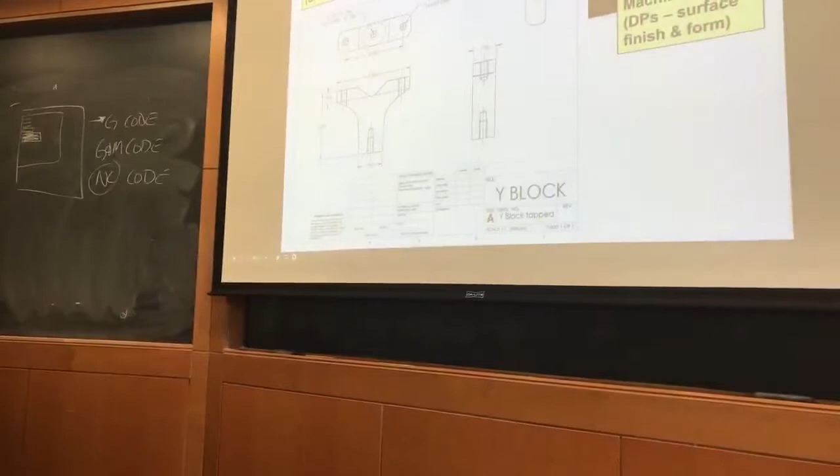Who said yes? So your two setups—I believe you put it in where, if we're looking down here... let me adjust this slightly, for all of you watching on YouTube at home.

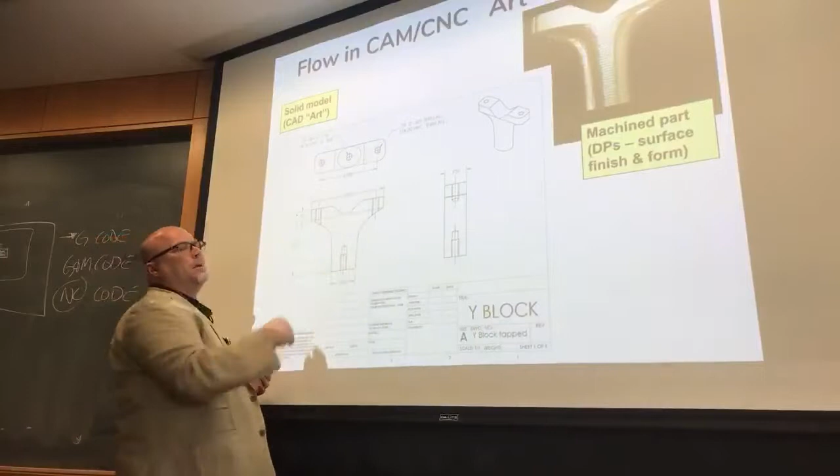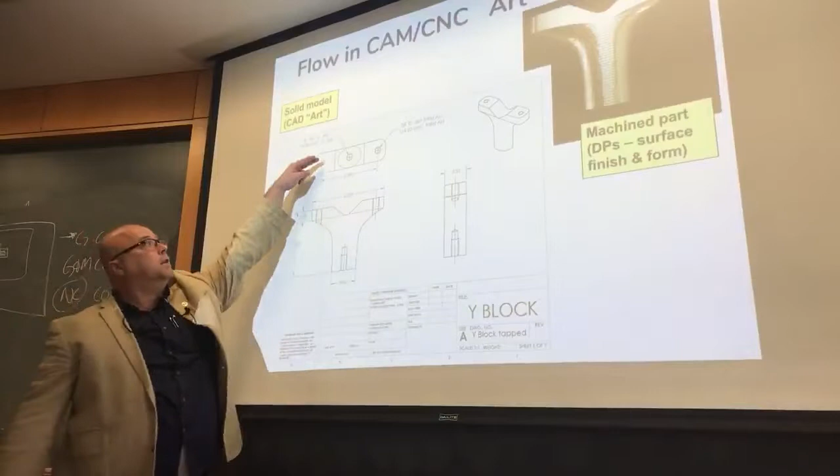All right, so our first operation, the spindle was above this orientation of the part, right? And so we cut—I don't remember the exact order—but I'm guessing we cut a contour around it like this, drilled and tapped the holes, and did a surfacing operation to remove the material in the V. Is that what happened? Maybe not that same order, but that's what happened, right?

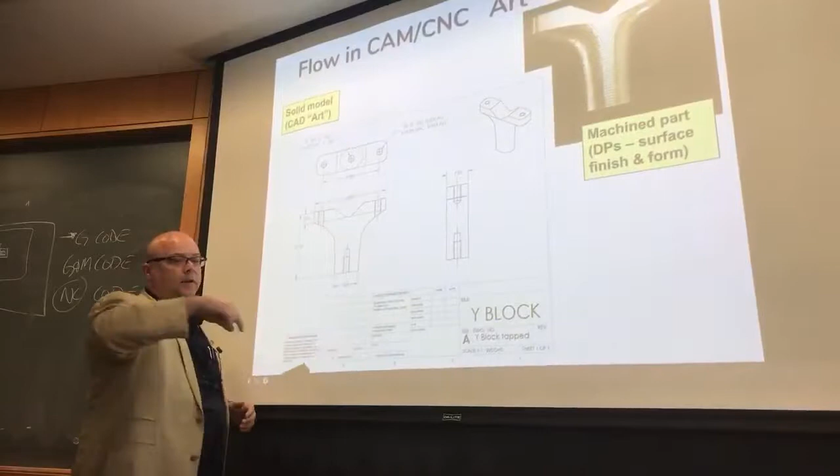So we did that, then flipped it over, clamped it on this part, and did a thing where that big face mill spiraled around the part. Was that cool when it threw the chips at the window? Yeah, that's why we do that the first day—because we totally want you guys to see cool stuff on the first day.

So, I mean, when you're at the machine, what do you have to do first? You have to put the workpiece in the machine, fixture it, right? Then you have to tell the machine where the workpiece is. Maybe you load the code before you do that step, but that's pretty much at the beginning.

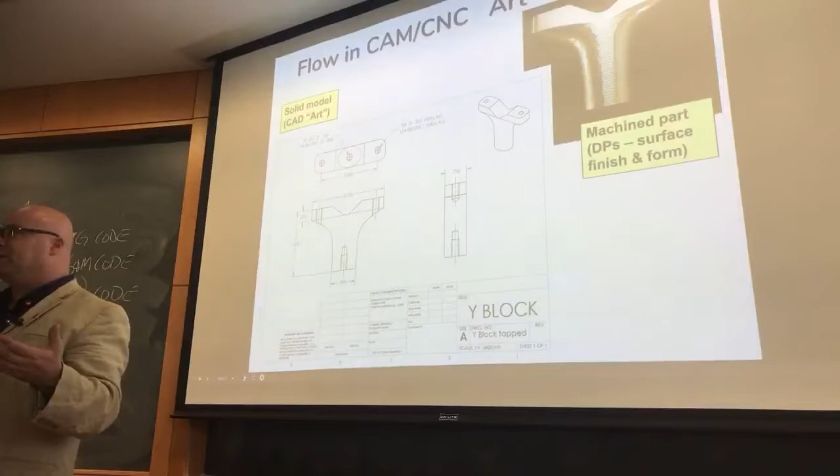There was a term where we taught the class in the order in which you do the operations at the machine. So we spent the first two weeks teaching people how to set up the machine, but never turned on the spindle. Two weeks into the class, somebody says, 'Hey professor, when do we use the machines that cut metal?' And I realized my mistake—we need to cut metal on the first day.

So you understand we're using the machine that cuts metal to do the setup operations. They thought we were just learning how to measure stuff—first two weeks.

Okay, so what if I was going to cut it in three operations, what would I do instead? We could cut it in 57 operations, but three is the next obvious choice from two. How would I do it? Somebody?

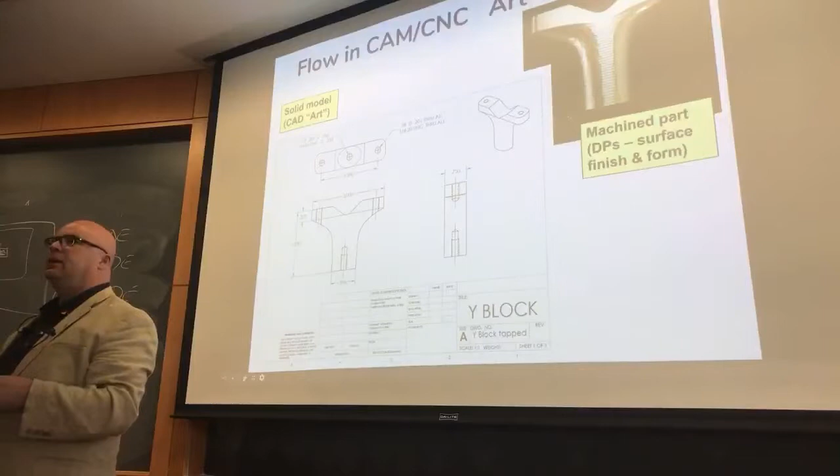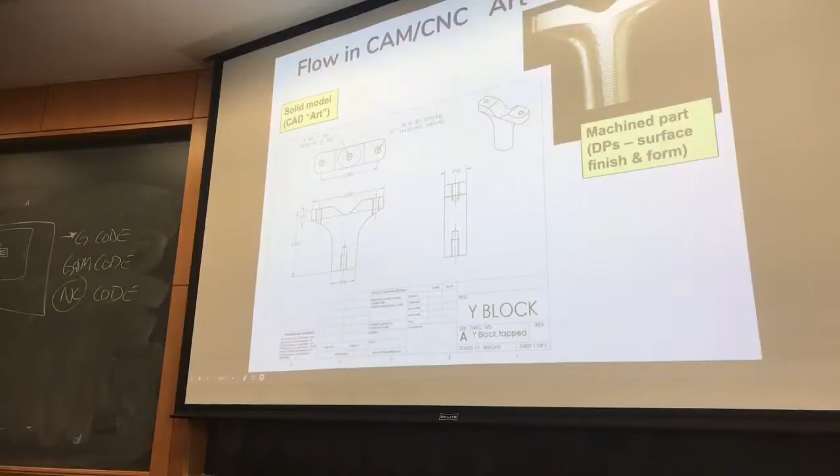Yeah, Andy. So you take it—you've got that tapered cylinder kind of thing. So you could do one side of that, coming down from one side, then do the other side, and then do the face with the Y on it. Uh-huh, I never thought of doing it that way, but yes, you could. That's not what I would do. Anybody else?

Anybody? Yeah. Oh, you could do that too. The really most obvious thing to do, I think, if you've cut a few parts...

So if we're looking down at the machine here, and that's the top of the vice jaws—does that make sense? If I'm looking down at the, so I am the spindle, I'm looking at the top of the vice jaws, and we've got our little parallels here that we put our workpiece on, and then we put our workpiece here. So we put our workpiece there, we could do a contouring operation.

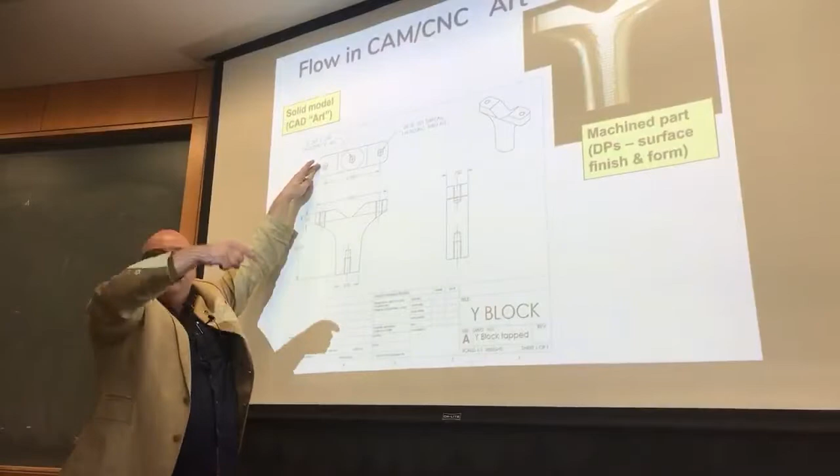That makes a V in the end of it, right? Then we could stand it up so that it's got this side pointed up, make the contour around it and drill and tap the holes, but then we don't have to do that surfacing operation to go down inside the V. Does that make sense?

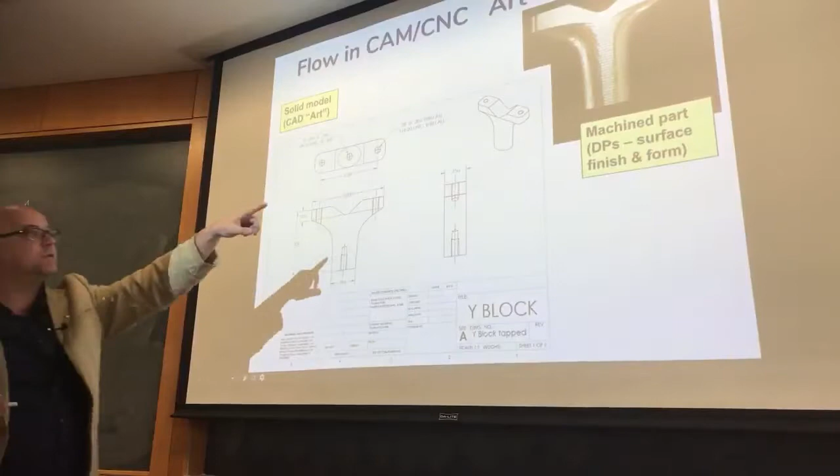So what do we notice about—well, I mean, you can see it here in the picture—tell me about that surface roughness. What do you notice about the surface there immediately? It's not, right? The drawing shows a smooth surface. This is clearly not a smooth surface, right?

What causes the scallops that we see on that surface? Let's just look at the profile. So if we're looking at the side of that part—right, if that's one side of the Y, and now you know why I'm an engineer and not an artist—but if we're looking at the front view of the part, what causes this roughness here?

Because you can see we've got roughness in that direction along the part, right? I mean, that's maybe not even roughness, maybe that's waviness. What causes that feature? Physics. I was going to say, wouldn't that be because of the, like, that side, like as you... Yep, you've got it.

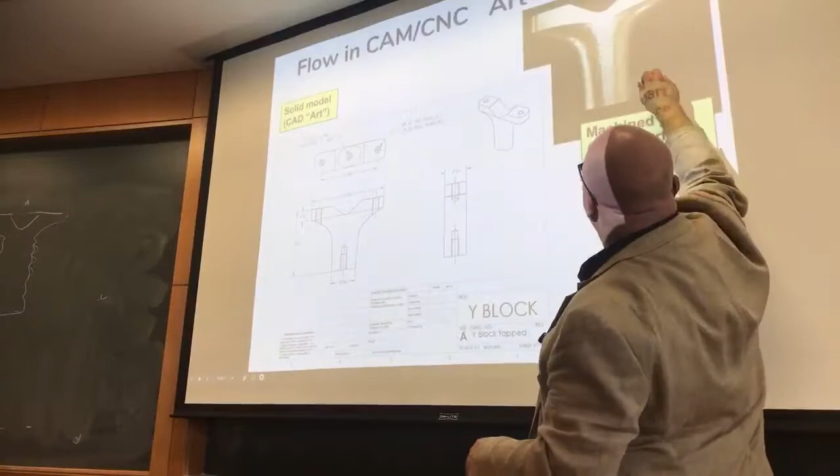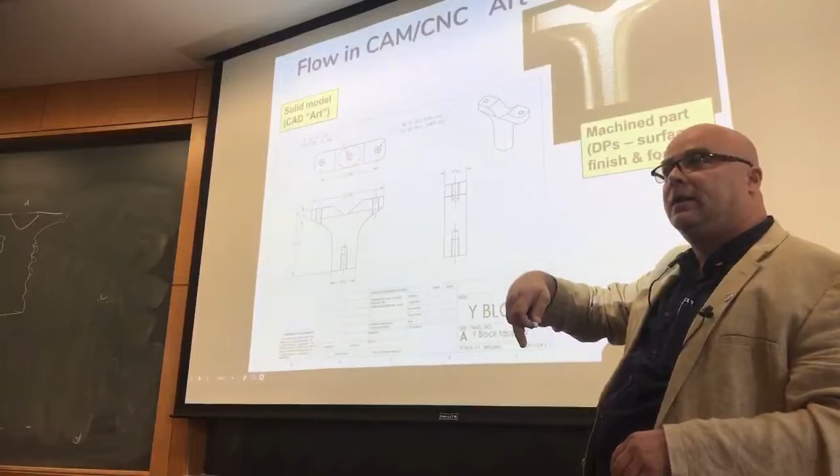So if this would be the top, now we're feeding in that direction. As the tool goes around the part, it also feeds down. It goes around the part and feeds down, it goes around the part and feeds down, right? So the radius at the bottom of that scallop is equal to the radius of the cutting insert that was on that tool.

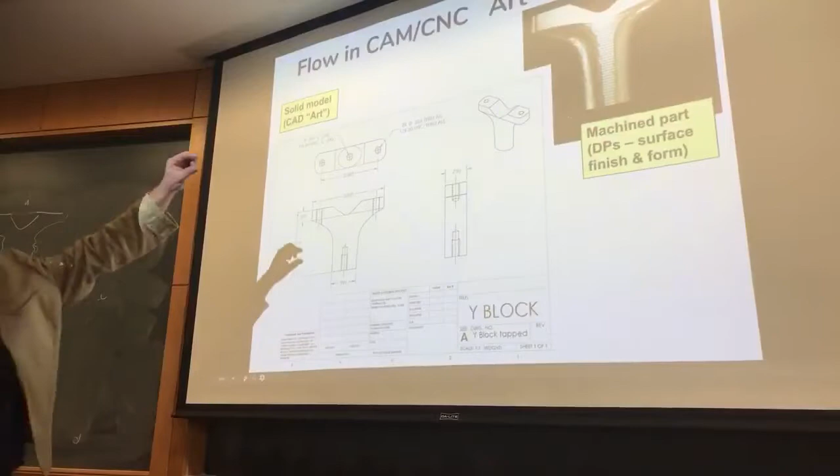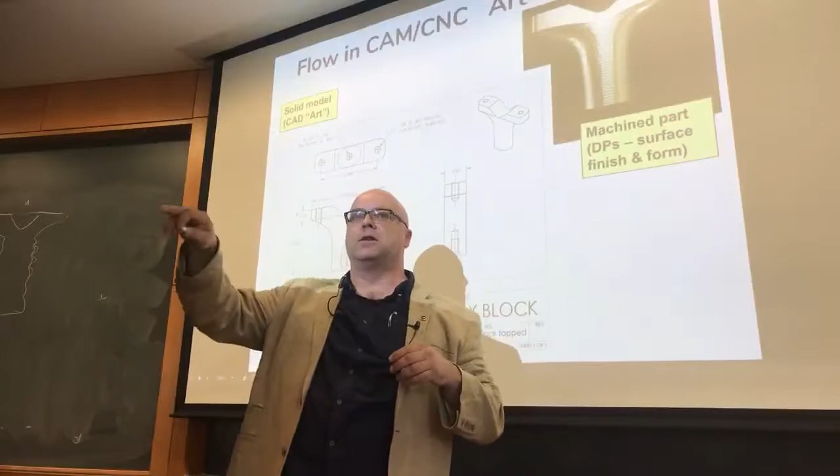The spacing between the two scallops is equal to the feed, in whatever units, inches per revolution, where the revolution is the tool going around the part, not the spindle spinning a revolution. And it's the same on a turned part. So let's do a turned part.

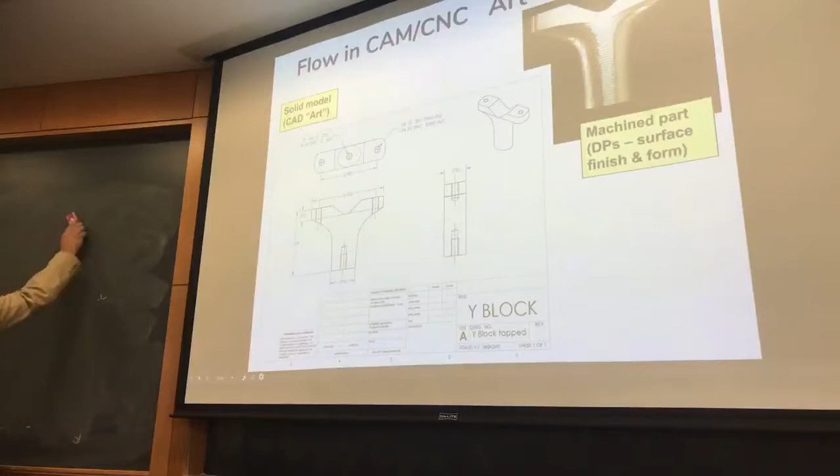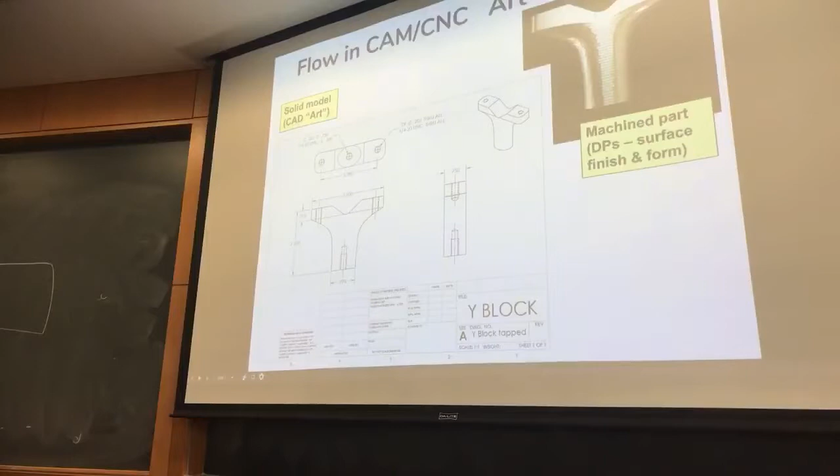So our turned part is spinning this way, our tool is here, and the feed is in that direction. As the tool feeds over, it doesn't make a smooth surface there. It actually makes little scallops across there. And so the distance here is the feed, in inches per revolution, in length per revolution.

It doesn't matter if it's inches, millimeters, kilometers, although it'd be a really small number if it was kilometers probably. You get that. You actually, with a little bit of math, you can calculate this distance too, because that's just the depth.

So you get the chord length across the chord there from your circle, because you can imagine that it's a circle. You get a chord that goes across there. It's the depth from the chord to the edge of the circle. And so mathematically, you can calculate that distance too. We do that sometimes to choose what feed rate we want to use based on how smooth we want that surface to be.

So if I want this to be smoother, how do I adjust my parameters? If I want the side of that Y block to be smoother, how do I adjust my parameter? Slow the feed down would do it. What else could I do?

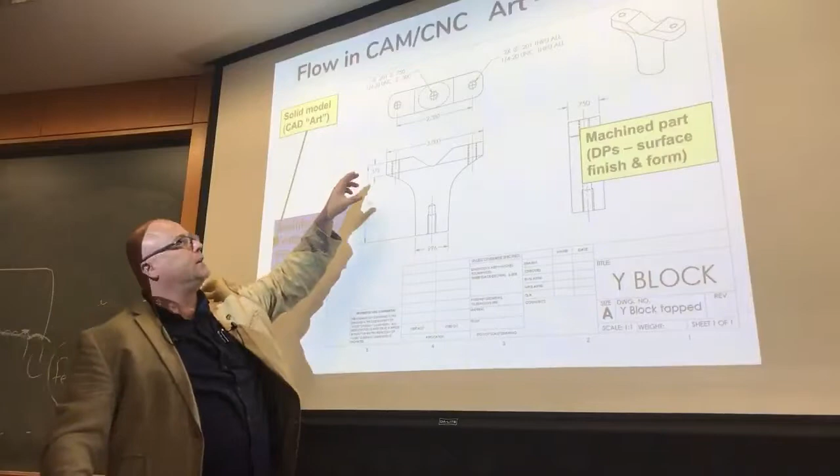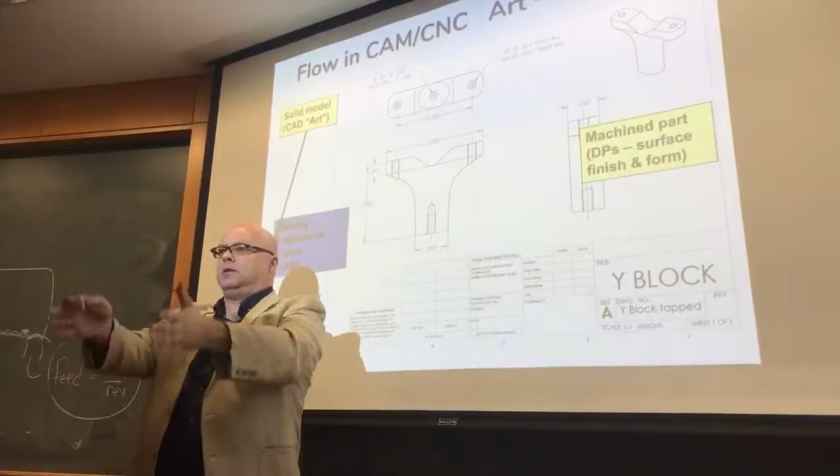It's got these tapped holes, three tapped holes on it. It's got this V feature. It's got the, I don't know what do we call this shape, the parabolic. This was originally, when it was designed, actually tapered in two directions, just to make it harder. But it's got the tapped holes, it's got that Y shape. Those are the features on the part.

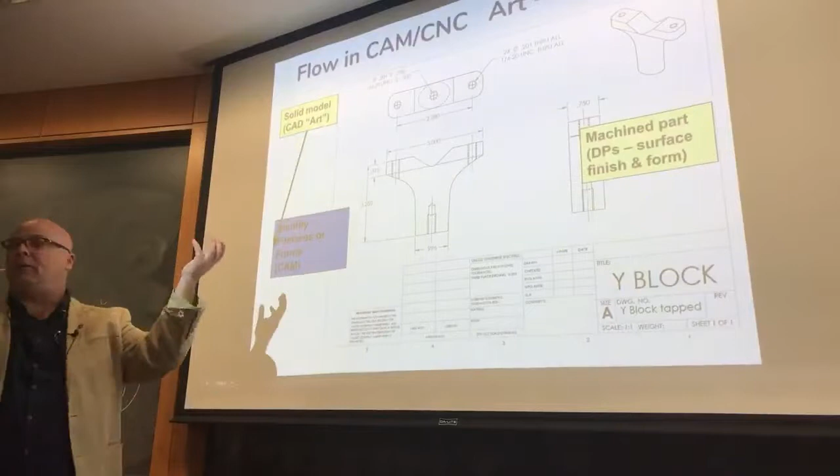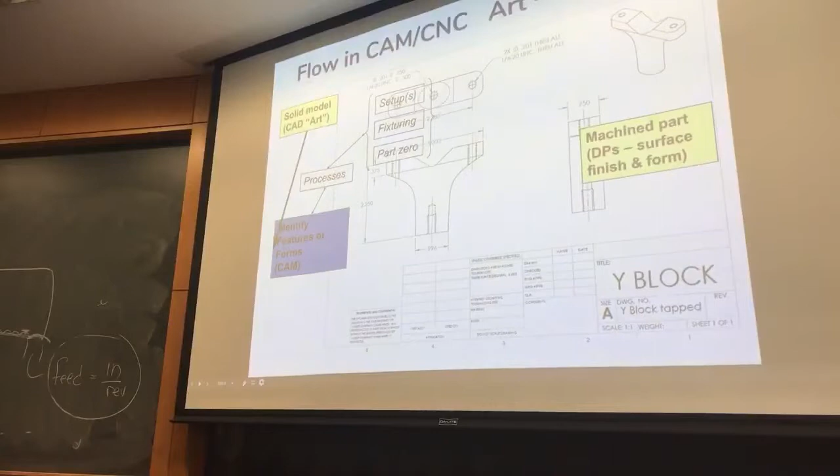So we identify the features, we decide how we're going to cut it, and how we're going to fixture it - how we're going to hold onto it once it gets in the machine. In this case, I've got the example of holding it sideways in the vise to make the V. That's what our tool path looked like. So we actually came in here, removed this material, and then we did a contouring pass - a pocketing operation and a contouring operation there.

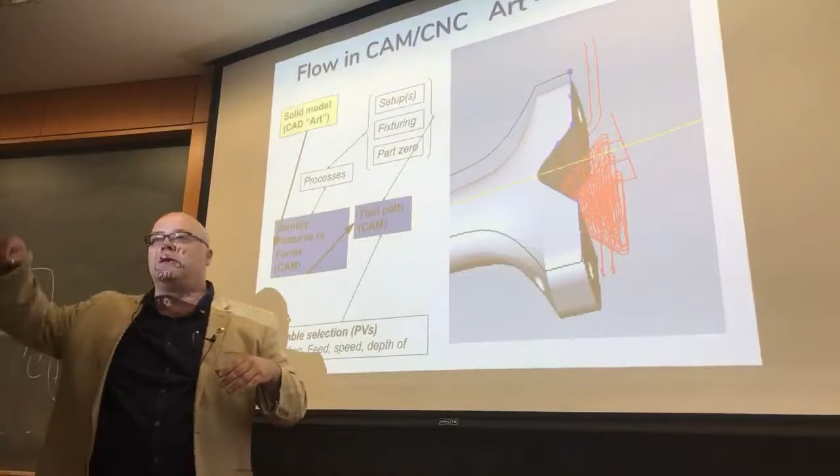So at this point, to make this feature, we've got to have a toolpath, right? So we've got to get tools, we've got to get feed, speed, depth of cut. We've got to figure out what's the approach move, how's the tool going to get to the part, how's the tool going to leave the part. We've got to tell the CAM software all those things. We select our process variables there.

When you do this, so we get everything all figured out, then we bring it to the machine. Then we have to load the tools in the machine, set the tool offsets, fixture the workpiece, locate the workpiece. Then we can run the machining operation.

This one is key, right? That's part of Shine from our lean lecture.

Clean up. If the part has sharp edges on it, try to design your processes so that you don't leave sharp edges on the part. If the part has sharp edges on it, when you take it out of the machine is the time to deal with that, because you're already holding the part in your hand. If you fill up a box full of parts with sharp edges, here's what would happen in manufacturing: you fill up the box with parts with sharp edges, and then you realize you can't ship the part with sharp edges. So you hire a temp to come in and take all the parts out of the box to deburr the edges, take the sharpness off. Just do it when you have it in your hand.

You might have to do post-process inspection. We'll talk about that at length next week. And then ship it to the customer. So it's not that much to do, right?

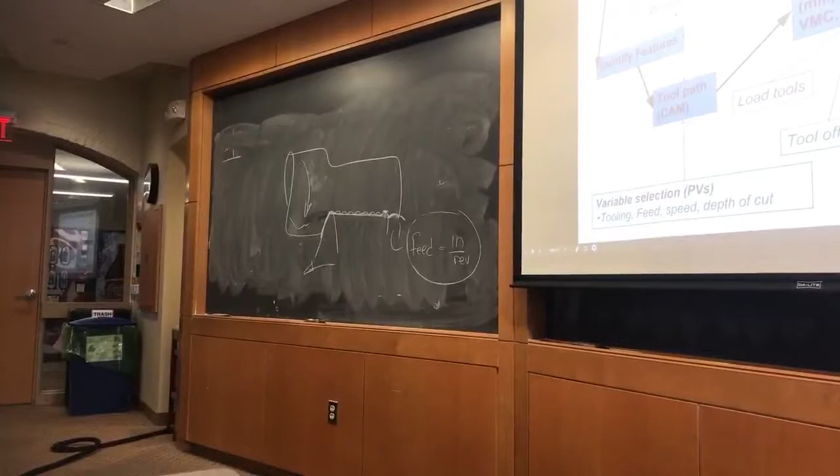People, especially students, graduate students—not so much the graduate students, advisors of the graduate students—they'll sometimes want to talk about why it takes their graduate students so long to get the help they're expecting in the machine shops, especially when they find out it was just a 2-minute cut time. It's not so much the 2 minutes the tool spends cutting the part in the machine. It's the 3 weeks it took you to get to those 2 minutes. That's what takes so long, right?

So if we practice, we get better at it. But this is our flow in art to part. It would be really cool for me if there was a clock on that side of the room, so I would know how much time I had left when I'm doing this.

Plenty of time. Perfect. All right.

So we figured out how we're going to hold it. We've figured out what tool we're going to use, right? Now we have to put that in the CAM software. And you guys, if you haven't started doing this yet, you're going to do this at length for the next—what do we got, 6 weeks left in the class? For the next 4 or 5 weeks, you're going to do a bunch of this, and you're going to get plenty of practice doing this.

So we got our CAM software open. We're going to make a pocketing operation right here. So what's a pocket on a milled part?

Gus? When you remove material from the inside of something. Does this look like a pocket?

This is what we call in machinist speak an open pocket. We can in fact have an open pocket that's open on all 4 sides. This one's actually closed here, closed along that arc, closed here, and it's only open on one side—but this is what we call an open pocket.

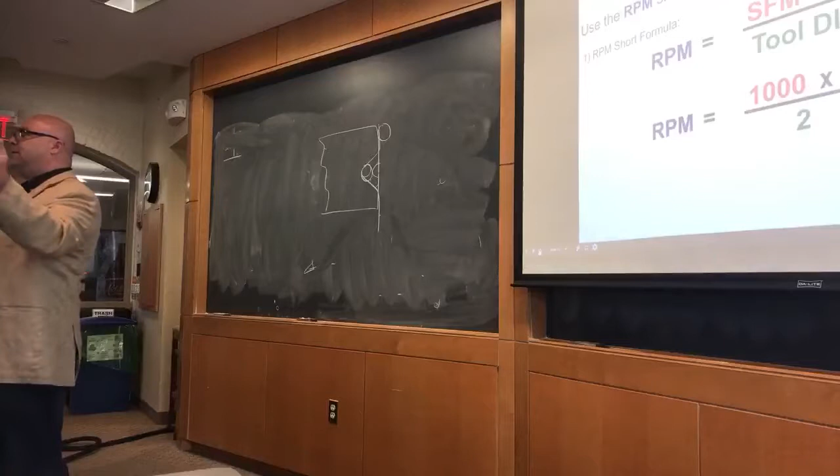12 inches in a foot, and pi is for calculating the circumference of the tool. We always give tool diameters and part diameters in inches, but we always give surface speed in feet, mostly just to confuse you guys.

Well, it's so the machinists can confuse the young engineers. You know what we call you guys when you get to the field, when you're practicing engineers? Kids with CAD. Because you're really good at drawing stuff and have no idea how it's going to get made. As soon as you bring that drawing to the guy in the machine shop, he knows you're a kid with CAD, because he knows you've drawn stuff that the tool can't do.

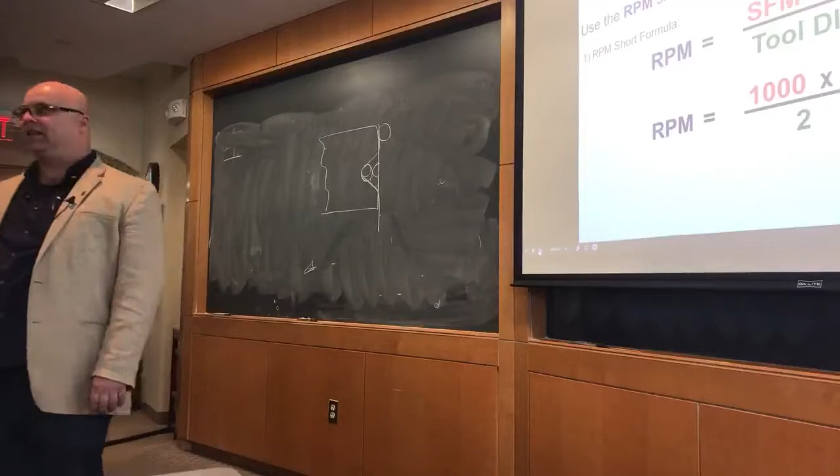You said make sure it's machinable, right? The tool ain't going to reach that location in that geometry. Oh, you guys use SolidWorks? Most of you have taken the intro to drawing class and played around with CAD software. Man, that fillet button is cool, huh? And the blend button, oh let's blend these two surfaces together.

Sometimes I advise MQPs. Once I was advising an MQP with 12 students on the team, broken up into subgroups. One group handled this part, another group handled that part, and one of the guys was taking care of the manufacturing part. By the way, especially if there are multiple advisors on an MQP, the group should have a meeting to talk about what they're going to discuss with the advisors before the advisors get there.

One of the kids put up his CAD model for a front steering knuckle for a car they were building. And Wayne stands up, feet apart, and says 'Dude, how are you going to make that?' Wayne was not one of the advisors, Wayne was one of the students on the project. Wayne is now a good friend of mine, he actually owns a machine shop not too far from here. So Wayne figured out how to make stuff.